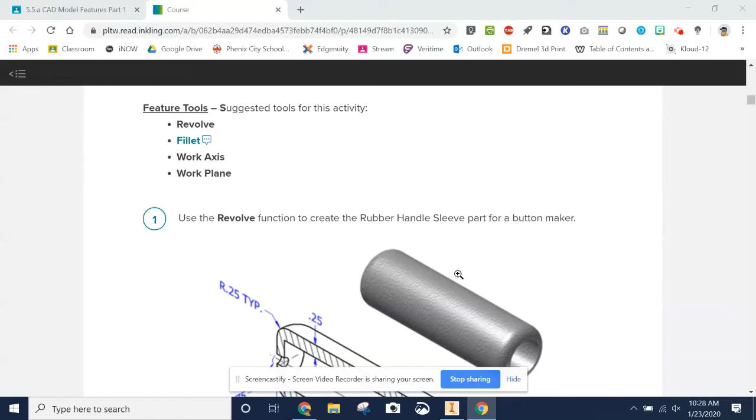All right, so I'll show y'all how to make the rubber handle sleeve, this right here. Like I said, y'all, it's important that the first thing you want to do is actually sketch this, and then we'll put the dimensions in. So what we do is we're going to start a new file, standard inches.ipt, make sure we're in the English template.

We're going to start a 2D sketch on the XY plane. All right. So I go back here, I'm going to start with this line, and I'm just going to use lines to roughly draw this shape. Doesn't need to be 100% perfect, just rough shape. I will at least put the dimension for this first one. I know that it is 4.469. All right, that'll let me get the rough shape for the rest of it.

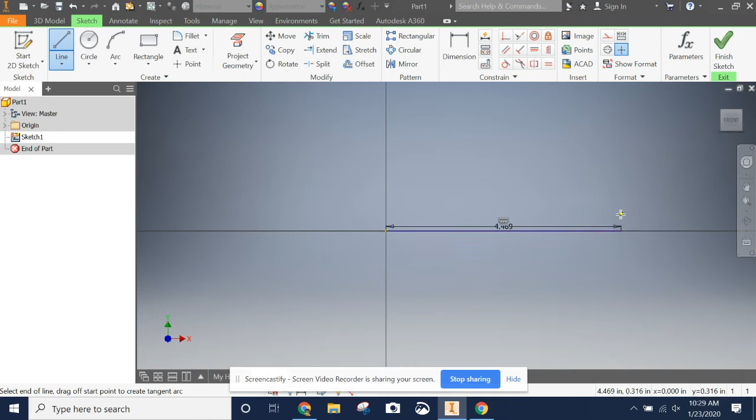So now all I'm going to do is just go in and just draw the shape. Right click, OK, and we have a closed loop. The next thing that you notice if you look at it is that the construction line represents the axis of rotation. What that means is that we need to put a construction line up here. So I'm going to turn on the construction line, and I'm going to use the line tool, and I'm just going to sketch a construction line. I'll right click OK, and then you need to turn the construction line back off. So remember, you do all that.

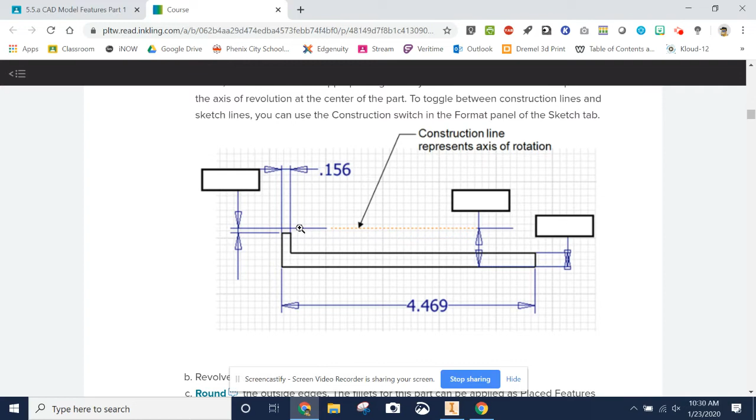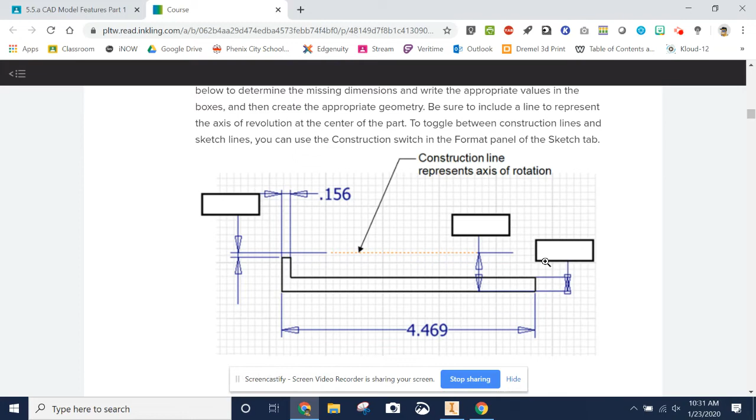All right. Next thing we want to do is put the dimensions that we know are there. So I know that the width of this is 0.156. So I'm going to put this dimension at 0.156. The rest of the dimensions we need to get off of the other sketch. These are fill in the blanks, and once you do these, the rest of it will fill in naturally. The easiest one is to get this dimension right here. This thickness is represented by the 0.25 right there. Remember that if you look at only this bottom half, that represents what we're sketching right here. So I'm going to make this 0.25, and there we go.

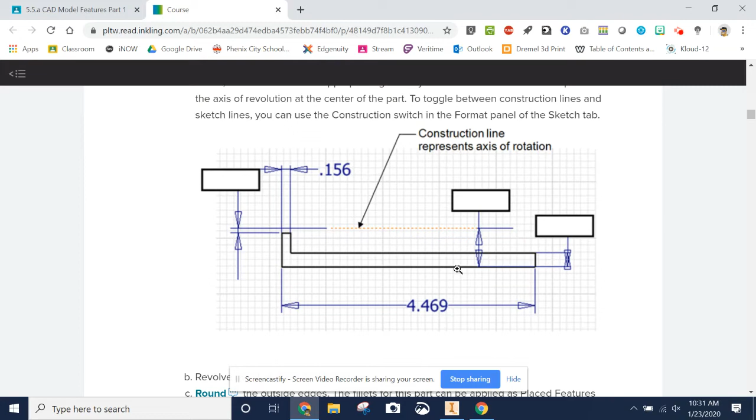The only other things that we're missing is the distance from the construction line to the top here and from the construction line to the outside edge here. Those are represented by these diameters. But there's a catch. Remember that a diameter is the full length from one side of a circle to the other, correct? And here we're not looking at the full length of a circle. We're looking from only the center of the rotation to the edge. So instead of a diameter, we're looking at a radius. And remember that the radius is half of the diameter.

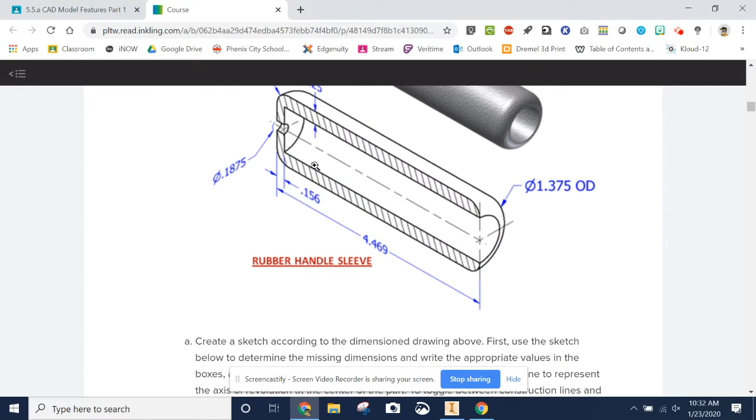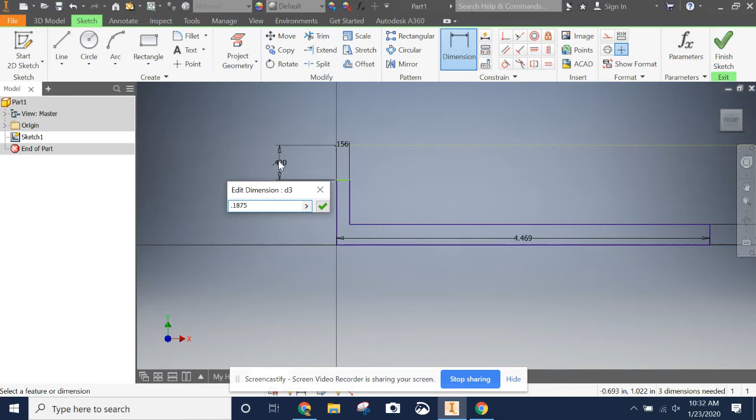Now, Autodesk can do the math for us. So we have this diameter of 0.1875 right here at this opening. I'm going to use the dimension tool from the construction line to the top. Click to place, click again to edit. And I'm going to put the diameter that was given, 0.1875, but then I'm going to use the slash symbol for divided by. I'm going to say divided by 2, because we want a radius, which is half the diameter. See how it's moved our construction line into place.

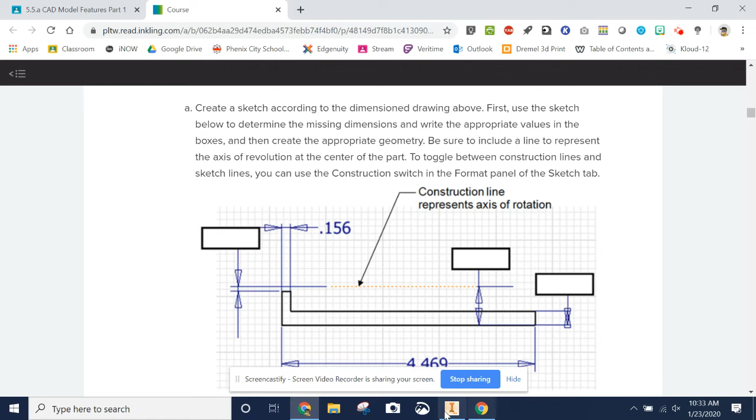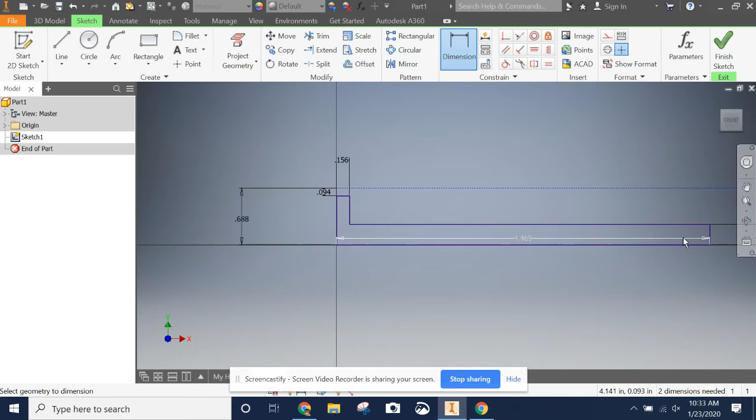The next one that we need is this outer diameter of 1.375. Once again, that is outside edge to outside edge, and that's going to represent this. So we're going to put the dimension here to here. This outer diameter is 1.375 divided by 2. So y'all see how that's modified that for us. It says 2 dimensions needed, but we should be constrained and good to go here. We've got all the dimensions necessary. So we're going to hit Finish Sketch.

All right, we look at the next step here. Revolve at a full 360 degrees. That's using the Revolve feature I showed y'all earlier. So we revolve, we've selected our profile. We need to select the axis we're going to revolve around. This is why the construction line is important. You have to revolve around the construction line. And the construction line gives you that opening in the front.

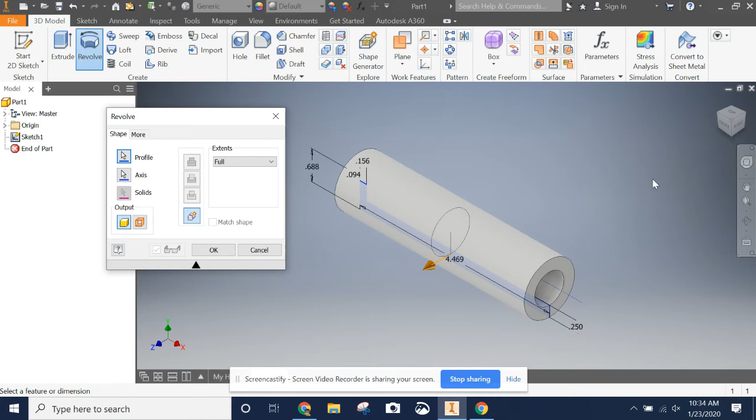I'm going to show you what happens if you don't revolve around the construction line. If you're following along later, don't do this. But if I just revolved around this feature, notice that it will close off the front, and we don't need that. So that's why when we revolve, we're using the construction line. All right.

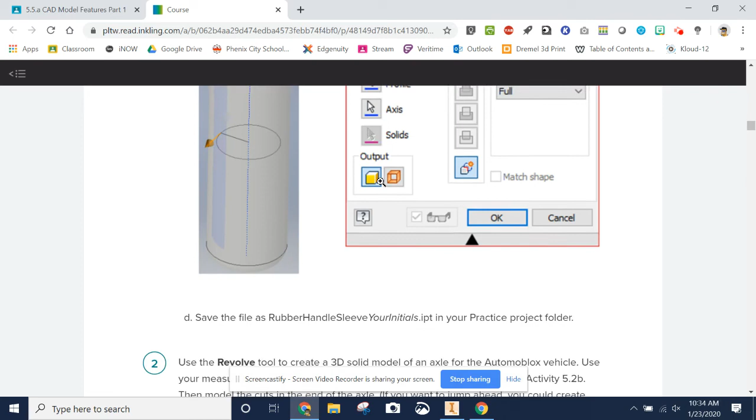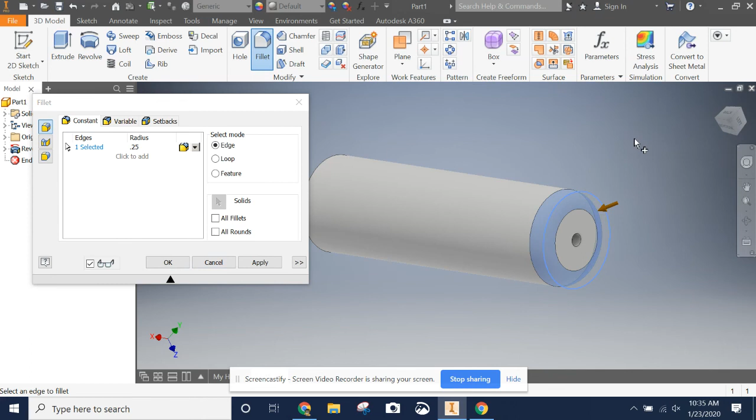Next thing that we need is to use the fillet feature on the edges. We need to round off these edges. So the round for the outside edges, and it gives us the examples right here. Our round on the outside edges is 0.25. We can see it right there. So we're going to use the fillet. We want our radius to be 0.25. Now we click the edges that we want to fillet. There's one, and here is the other. We hit apply, and there we go.

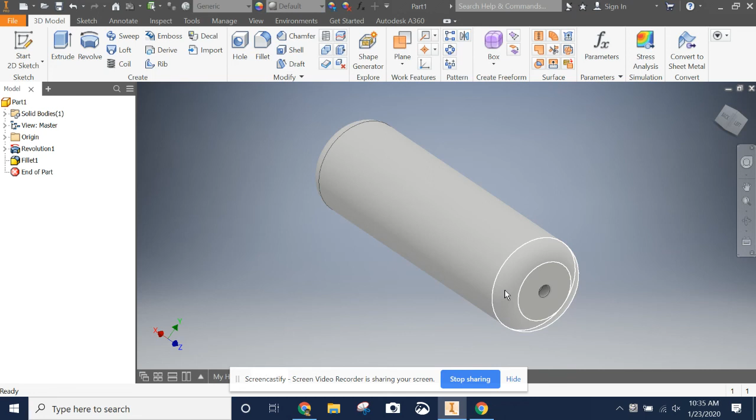So with that, the rubber handle is done. If you want to change the appearance using the color menu, you're more than welcome to. This is how you complete the rubber handle.